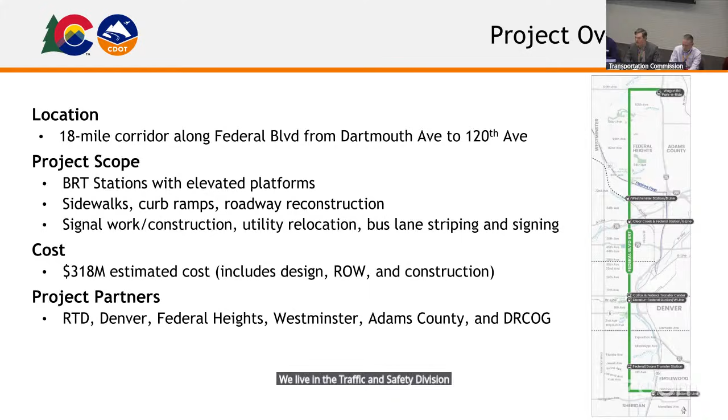Thank you, Jessica. So as Jessica mentioned, my name is Ryan Knowles. I'm the Bus Rapid Transit Program Manager for CDOT Region 1. We live in the Traffic and Safety Division and are led by Angie Drum, the Deputy Director of Traffic and Safety. We started the Federal Boulevard BRT project in late 2023 and have made really good progress over the past 2 years on this project.

As an overview, it is an 18-mile long bus rapid transit project from North Westminster at 120th Avenue to South Denver at Dartmouth Avenue. The project scope includes 74 individual BRT stations with elevated near-level boarding platforms, sidewalks, curb ramps, some roadway reconstruction in parts of the corridor, as well as signal work, utility relocation, and then bus lane striping and signing.

The overall cost for the 18 miles is roughly $318 million. This includes the design costs as well as right-of-way and construction. And we've been working very closely with our project partners, primarily the Regional Transportation District, also the City and County of Denver, cities of Federal Heights, Westminster, Adams County, and the Denver Regional Council of Governments.

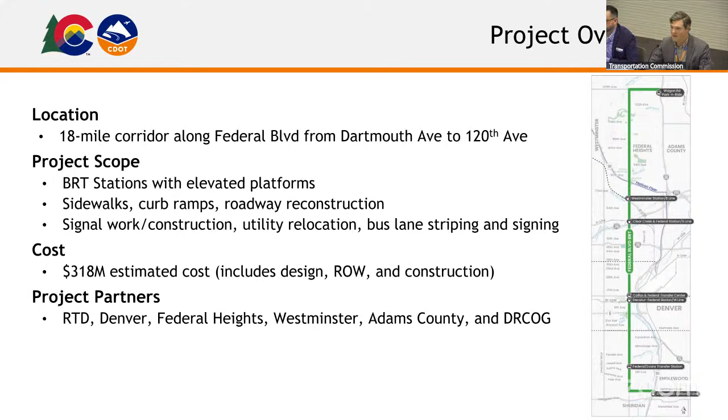Our goals for the project are to improve safety along that 18-mile corridor. Federal Boulevard is on the Vision Zero high injury network and has a disproportionate number of serious injury and fatal crashes. And so that's an important factor.

Also through our engagement, we've heard about the importance of safety and security at transit stops and on the buses. And so we're working that into the design of the project. The project intends to increase transit reliability and ridership with the intent to decrease transit travel times, making transit competitive with driving.

Along this corridor, we are promoting cultural vibrancy and quality of life issues. It's a very diverse corridor over that 18 miles. And so we're working very closely with the communities and neighborhoods along the corridor to improve those areas through this project. We're also focused on transit accessibility, primarily through the BRT components like the platforms that I mentioned, as well as improving connectivity and mobility.

So ensuring that transfers between transit routes are efficient and effective, and also connecting to bicycle and pedestrian networks throughout those 18 miles.

This previous summer, we completed our 30% design milestone, and we will be releasing an RFP for final design in the first quarter of this year. We're also close to completing our NEPA review and evaluation and expect our document to be signed spring of this year, and we're expecting it to be a categorical exclusion.

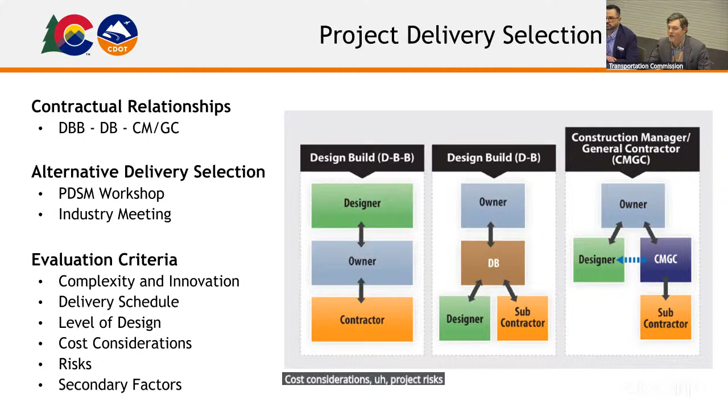So we evaluated design-bid-build, design-build, and CMGC for potential delivery vehicles. I won't spend a lot of time talking about the differences because we covered it last month, but we did evaluate the project in terms of complexity and innovation, delivery schedule, level of design, cost considerations, project risks. And then we included some secondary factors in our selection matrix as well.

We evaluated that criteria against our delivery goals, which are to achieve BRT revenue service by January 2030, in line with the greenhouse gas planning standard that we are mandated to meet. Prioritize safety and connectivity for all modes before, during, and after the construction phase.

Coordinate with local businesses to mitigate construction impacts. Maximize safety for workers and the public during construction, and also maximize the project scope and the improvements with the available budget we have when we start construction.

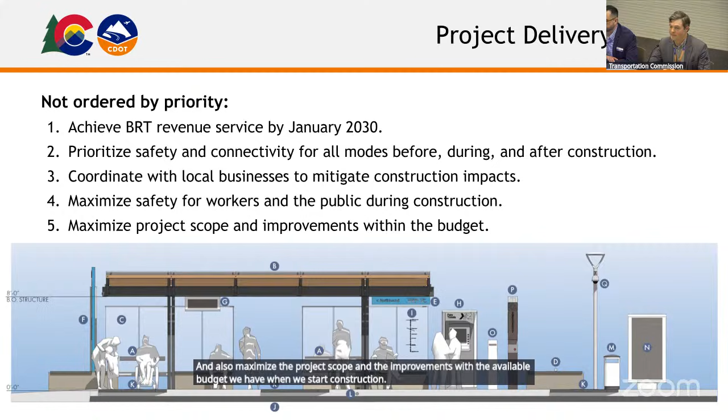Additionally, the CMGC method allows us to adjust packaging and construction phasing with the available budget that we have at the time of construction, which the other methods do not.

Finally, CMGC allows us collaborative risk allocation across the different packages that we may develop with the construction manager. That's important because it'll allow us to begin parts of the project that are ready for construction while other pieces that may be taking longer continue to be developed and worked out.

We held a public meeting for the industry on December 17th of last year, and we shared a lot of the information I just covered with the industry. We had over 30 participants at that meeting and recommended the CMGC delivery vehicle.

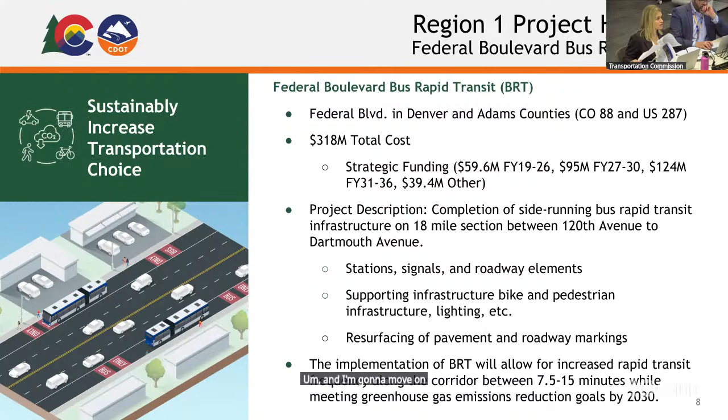Setting the stage here, because the I-25 corridor is so large and so complex, it spans several regions. I'm going to present the first couple of slides, then kick it over to Paul DeRocher with the Division of Transit and Rail to talk about the success of Bustang. But Heather and I both felt it would be helpful to give some background and context for the I-25 corridor, given its length, size, and complexity. You'll see the project spans both Region 1 and Region 4.

In 2001, an environmental impact statement was initiated, about two decades ago, with a record of decision in 2011. The limits of that environmental impact statement covered north of Union Station to Wellington and west to US 287 and US 85. Subsequent to the record of decision, many improvements have been made along the I-25 corridor, but several still remain. The corridor still remains a very high priority of all the stakeholders in the I-25 North corridor.

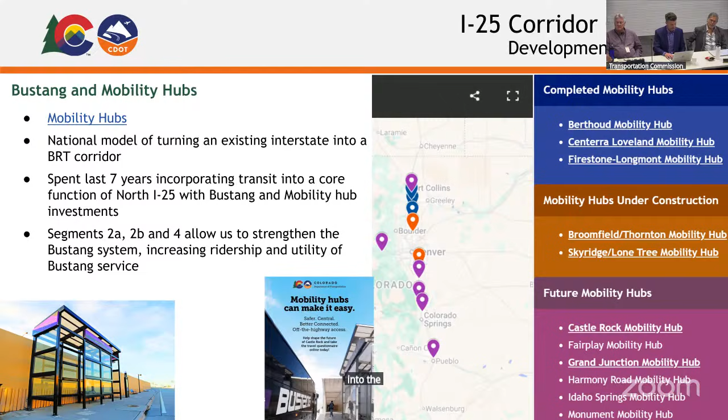Thanks so much. Okay, now that we've given you a little history and context of the I-25 corridor, we are going to deep dive into segment 2A, which is on the southern end of the corridor. Segment 2A on I-25 extends from US 36 to 104th Avenue.

We have about 270 million anticipated total cost. The project has been on the 10-year plan since 2020 and has been identified as a priority for stakeholders since the early 2000s. The project is currently undergoing an environmental assessment. As we discuss this project, we are looking at various alternatives, but we generally have an idea of what some proposed alternatives could look like.

Generally on this corridor, we have a major safety concern, both northbound and southbound. Crashes on the corridor occur almost daily, and the proposed alternative we've come forward with has a potential crash reduction of about 46% or more. On average, there are about 2.7 crashes per day on just this 5-mile segment.

For those of you watching the news or driving the corridor on December 28th, after Christmas, I-25 was closed twice for several hours—once northbound in the AM direction, and then again in the southbound direction for several hours. So it's really impactful when crashes occur in this part of I-25 and the corridor is closed.

As it stands, we're looking at alternatives to replace the fair-rated 88th Avenue bridges, which will include a new bikeway and expanded sidewalks on both sides, and the addition of a general purpose lane, both northbound and southbound.

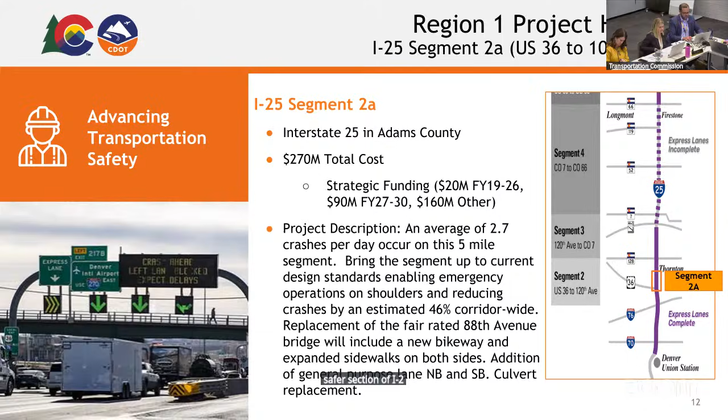Moving north, I-25 segment 2B from 104th Avenue to 120th Avenue. We're currently anticipating this would be about an $85 million improvement. Segment 2B is new to the 10-year plan, as Director Lew mentioned. We currently have this portion of I-25 in the out years of the plan, but this segment is not new to the local communities and stakeholders. They've been asking for improvements for over 2 decades.

Segment 2B currently has substandard shoulders that require improvements for safety and operational efficiency, as well as safe access for enforcement and first responders. Given that the project is in conceptual design, very early at about 15%, we've included a template in the 10-year plan with a conservative cost estimate that could cover improvements up to shoulders, potentially general purpose lanes, merge lanes, and a new pedestrian overpass at 104th by Cinzzetti's. The current one is starting to lose its useful life. As the project moves through design, the alternatives and solutions will be further defined.

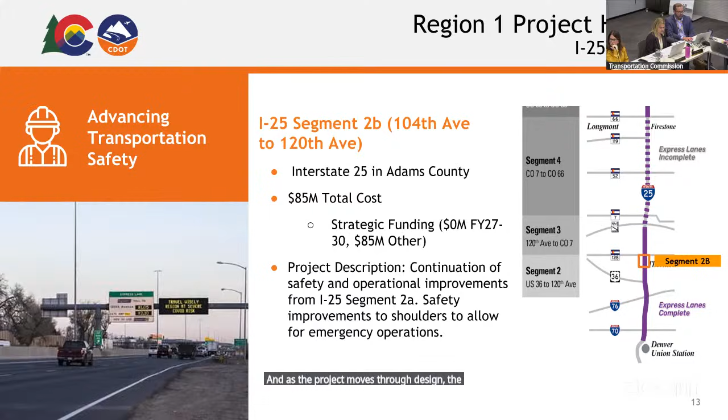Still traveling north on I-25 to segment 3B. This segment goes from E470 to CO7. We're anticipating a potential cost of about $315 million, based on FIR level design, which is about 30% design. So not crayon design anymore—we've got lines on paper and some levels of impacts.

I-25 segment 3B is new to the plan, and it is proposed in the out years. Again, it's not new to the local communities as a priority. Segment 3A is complete from 120th Avenue to E470, but 3B extends from E470 to CO7 and includes the full interchange build-out at CO7 and I-25. Once that interchange is constructed, it will provide regional and local transit connections from Boulder to Brighton and Fort Collins to Denver, as CO7 is seen as a major hub, with some proposed BRT corridors on Colorado 7 as well.

As I mentioned, this portion of I-25 is about 30% level design, so our cost estimate for the plan is based on that. The cost estimate also includes some cemetery right-of-way that's currently not being utilized—we're hopeful to potentially look at acquiring that before it's utilized—and a major utility transmission line relocation. If you've driven that portion of I-25, you've seen the large transmission line present.

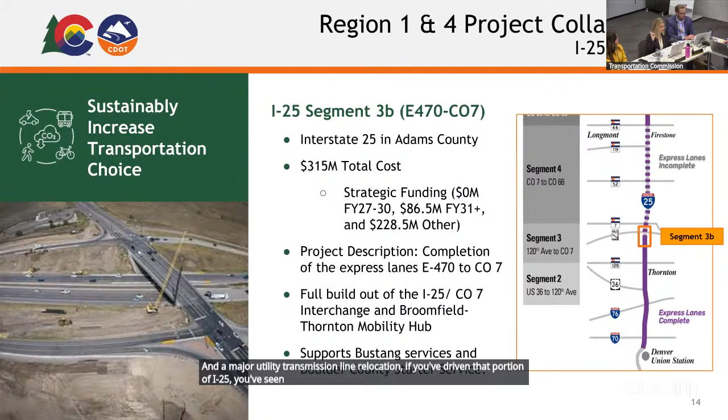All right, a project most of you have been hearing about for several months from the community, and mentioned several times today: the I-270 corridor. This project is currently listed in the plan for $900.8 million.

I-270 was in the original 2020 plan as one line item. The current proposal is to break out the project into various elements to show the project and have budget transparency. So if you're looking at the old purple colorful sheet and compare it to the new one, we've broken it out into several line items: critical bridges, Highway 224, Phase 1, Phase 2. What we really want to do is provide transparency to the public on where the bucket of the $900 million is being allocated, and hopefully provide all of you that transparency as well.

As I mentioned, you've heard a lot about this project. It's currently undergoing an environmental impact statement. Public hearings occurred last night, and we have our last virtual one. Thank you to those in the room who've been attending—those require a lot of effort, and we really appreciate your time if you've come to the meetings.

As proposed, the preferred alternative is the replacement of the corridor's most structurally and operationally deficient bridges, addressing key structural deficiencies and supporting future phases by advancing mainline segments to the selected preferred alternative footprint.

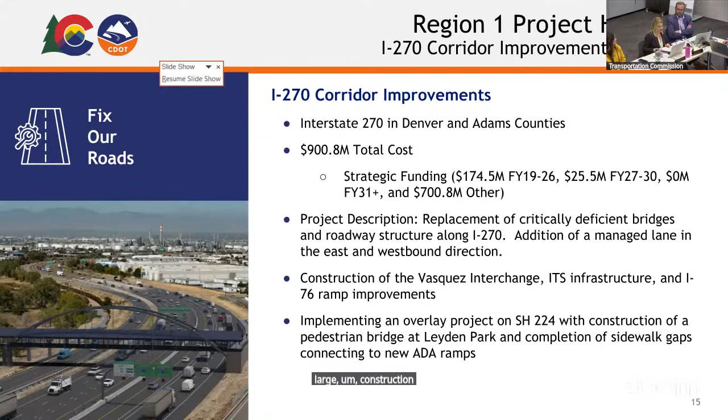All right, the North Stadium safety access improvements. This is a really fun project. As most of you are aware, the Broncos Stadium is moving to a new location, to a property at Burnham Yard. You can actually see it from our headquarter windows kind of down to the southeast.

So this is in the out-years of the plan. It is a new line item. It is an adjusted line item from our prior 10-year plan, where there was a $30 million line item sitting for I-25 safety and operational improvements. So it's not a new line, it's just kind of a renamed and redirected funding line for a very similar area.

As part of the infrastructure improvements for the stadium, the proposal for the 10-year plan is to keep that $30 million dedicated to improvements along the north side of the stadium, which you can kind of see on the map there. While other roadways will need to be upgraded and improved as part of construction of the stadium, many of those are under jurisdiction of the City and County of Denver, such as 6th Avenue and 8th Avenue. And several of those are also covered by the recently voter-approved bond that Denver just passed. CDOT has jurisdiction over Colfax, Highway 40, located on the northern side of the stadium site.

So while we don't know the exact improvements that we're looking to build or exactly what type of NEPA we'll be doing, we are working closely with the City and County of Denver and the Stadium District on a design and traffic and mobility study that will further define what we are going to construct. However, I do want to note that the $30 million is our max that the state is contributing to the stadium area. And I'd be remiss if I didn't say, go Broncos, beat the Bills.

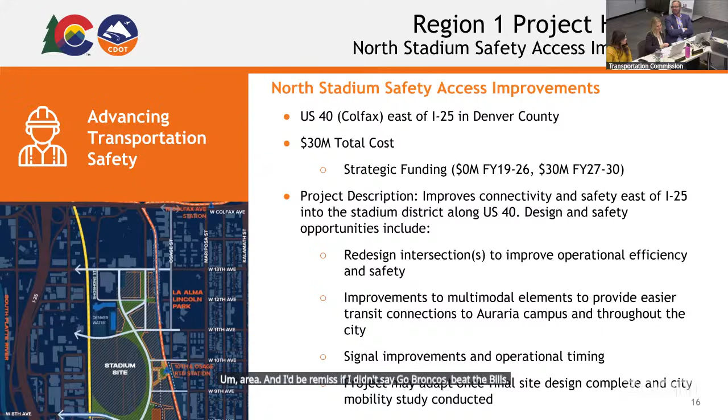All right, so a little bit smaller scale, but of real big importance. Some of these are our tiny but mighty things on our transportation system that you may or may not notice as you drive around. I'm hopeful that the next time you pull onto a ramp, you'll notice one of our ramp meters and you'll think, gosh, these are 1980s technology, very antiquated.

So this project aims to modernize our aging ramp meters. Those are the kind of lights you pull up to at a ramp and they sometimes are turned on and will signal red or green for you to move forward into the flow of traffic. We really need to modernize this system. As I mentioned, a lot of them are from 1980 and the computer technology behind them is just old and outdated. So we are looking at replacing the critical components of those, the detection equipment of the ramp meters.

So what do ramp meters do? They reduce congestion, they minimize delays, and they enhance overall safety of the corridor, and they contribute to more efficient traffic operations within the region. So this project is really critical for us to get out there and fix our roads.

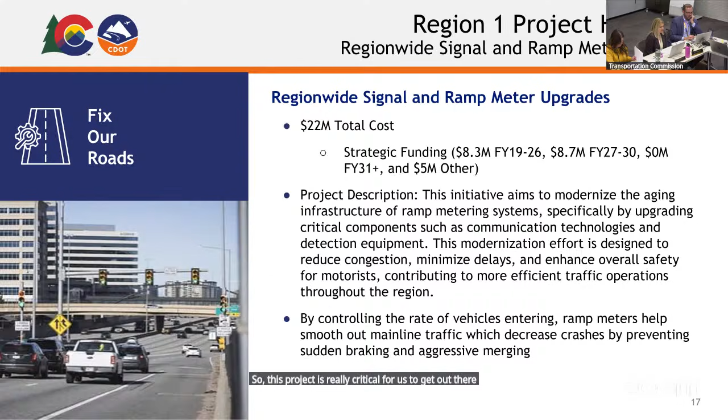And last slide, thank you. I mentioned earlier, Colorado Boulevard BRT. We did break that out, this is not a new line item in the 10-year plan. It is an item that is broken out from the region-wide BRT. Federal BRT is the other one we talked about earlier.

So BRT has been in the plan since 2022, and currently Colorado BRT is in the out years, so 31 plus for funding. It's currently undergoing Federal Transit Administration alternatives analysis, which we call AA.

We have yet to determine the alternative that we're moving ahead with. So the plan and the cost kind of assume what we think could happen, but we are still evaluating and getting input on these center or side running alternatives.

We do have public engagement underway. Currently, RTD serves Colorado Boulevard with Route 40. It operates 7 days a week, with frequency Monday through Friday every 15 minutes, and Saturdays and Sundays every 30 minutes. So what we'd be looking to do with the BRT project is improve the efficiency and regularity of that bus service along the corridor.

We have not applied for FTA funding as part of this corridor. That's something we'll evaluate once we understand the ridership and the alternatives that we propose.

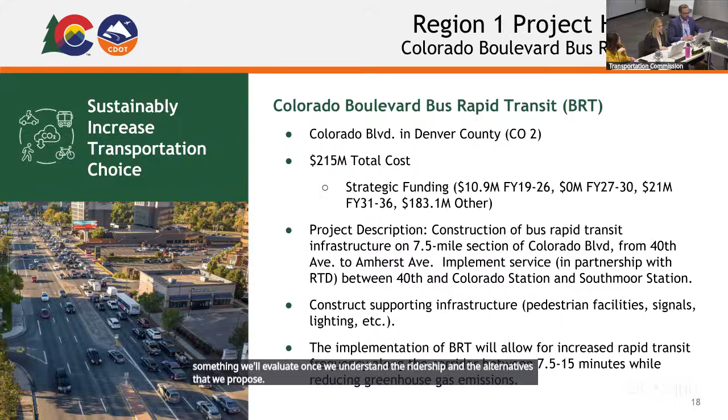And those are the ones that we highlighted for today. Realizing out of the 31, I only highlighted a handful. So if you have questions on any others in the plan, we're opening up the floor for questions. We had the whole project list within our packet.

Darius, did you have some? I think we wanted to give a pause before we move on to Region 4 for questions.

For Region 1 projects, before I do that, I wanted to say I had the chance to go to the 270 public hearing and hear the testimony on Saturday, and I saw on display the kind of work that you talked about, Director Lew. I'm really impressed with all that goes into these. It becomes more evident in those public hearings, but I know it's always happening behind the scenes. So thank you all for what you do.

Okay, any questions for Jessica? Yeah, Commissioner Ritter, go ahead.

Commissioner: Paul, you began by indicating that any improvements on I-25 were contingent upon funding of Bustang. That sort of puts a Damoclean sword over this commission, doesn't it? Because according to your chart, there was about 150,000 people that use Bustang, and there's probably, didn't put it up there, about 2 or 3 million that use I-25. I'm trying to get a sense of how that balances with the directive that unless we fund Bustang, there's nothing to improve I-25. What's the rationale on that?

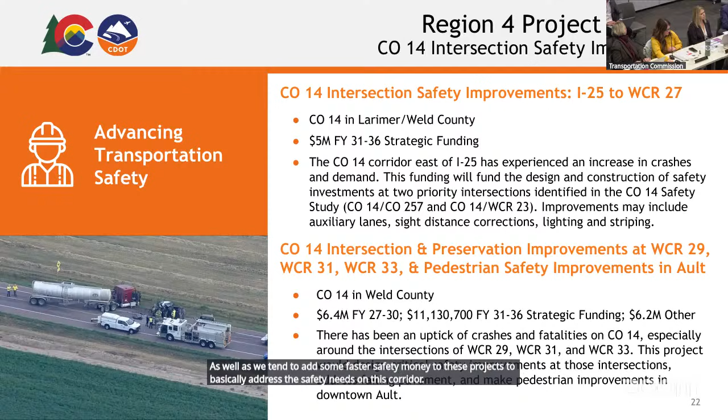Next slide. This is CO52, another safety project. This is a corridor where we did a PEL study pre-pandemic, and then had to update it during the pandemic to reflect those numbers and revalidate after the pandemic. 52 ties into 119 in Boulder County, and then stretches across the I-25 corridor into Weld County, crossing through many communities like Erie, Firestone, and Dacono.

This is another area where the triangles represent our level of safety service. If it's a red triangle, it's level of safety service 4, the worst level, identifying the highest need to address safety, and the orange circle is level of safety service 3. So this project is intended to take a look at those stretches where we are seeing high crash rates and see what we can do to improve those intersections.

One of the things heavily identified in the PEL is that this is really an old road that has no multimodal access, so no pedestrian walkways, and where they do exist, they're completely outdated as far as ADA ramps. So as we look at these intersections to improve operations and safety, we'll also be tying in those multimodal components to make it more of a multimodal corridor.

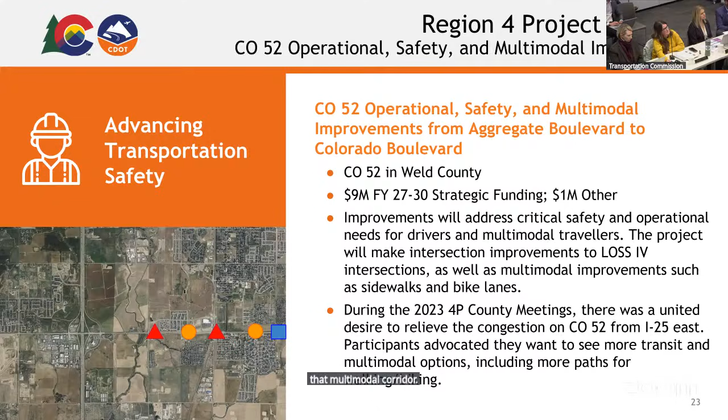Next slide. So this is I-76, between Keenesburg and Roggen, about a 10-mile stretch, also in Weld County. This is probably the interstate we hear the single most complaints on, probably second being I-70, which we are actively addressing as we speak today.

This is a section of road that ironically doesn't show up on the federal poor list, but is 100% low drivability. This is the one where everyone's dentures fall out as they're driving this corridor and everything falls off their trailer. So we're putting a lot of money into this interstate to do significant repairs, not a full depth reconstruction, but to preserve the life of this corridor. Our teams are out there consistently replacing potholes, and this is a high priority for this community to get this interstate back up to snuff.

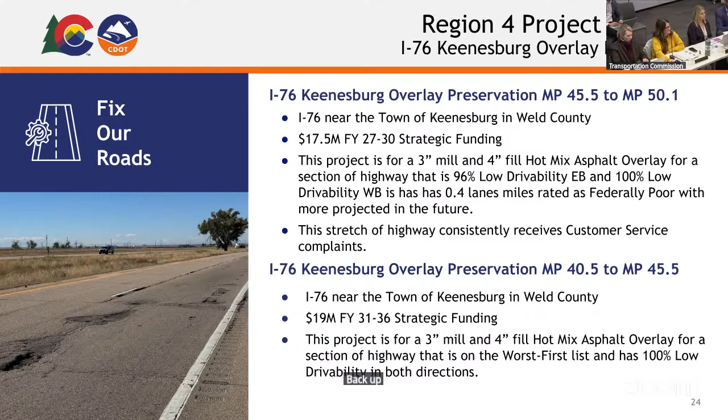This is a rural road, CO 59, not a county road, though it looks like one unfortunately. That picture is somewhat reflective of a lot of that stretch. We just recently did a project in the current 10-year plan, replacing about 10 miles of roadway, and we have 2 more projects identified, one in the next 4 years and another in the out 6 years of the plan. These roads historically never showed up in our surface treatment match because they're really old, haven't been replaced in a lot of years, and have really low volume, so they rarely rise to the top of the list.

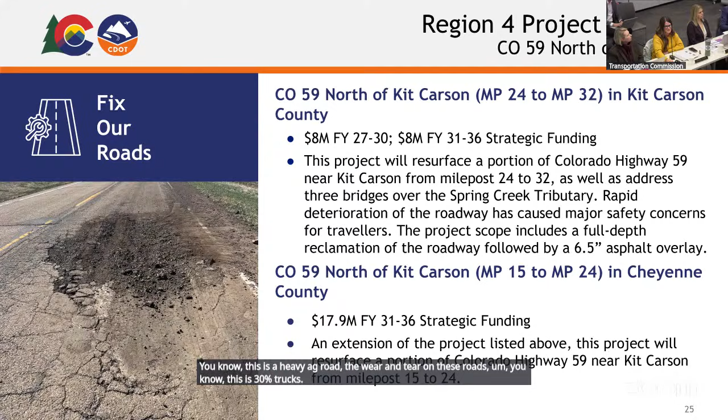Thankfully, through the rural resurfacing program in the 10-year plan, we can address some of these rural roads. This has made a big impact to the community out here, and they're very excited to see this. This is a heavy ag road, 30% trucks, and the wear and tear beats up the life of these roads pretty quickly. Next slide.

This is another wonderful picture. This is US 287, a concrete joint that is failing. We've got about $12 million in the next 4 years to evaluate why these joints are failing. We're doing a petrographic forensic analysis of the concrete because the rest of the concrete is in good shape, but the joints are not. The intent is to identify why these joints are failing and why the slabs are moving, which creates an unsafe condition. This roadway is 48 to 50% freight, and the jumping and trailers bumping up and down on these joints really creates a safety issue, which is why we're prioritizing this project.

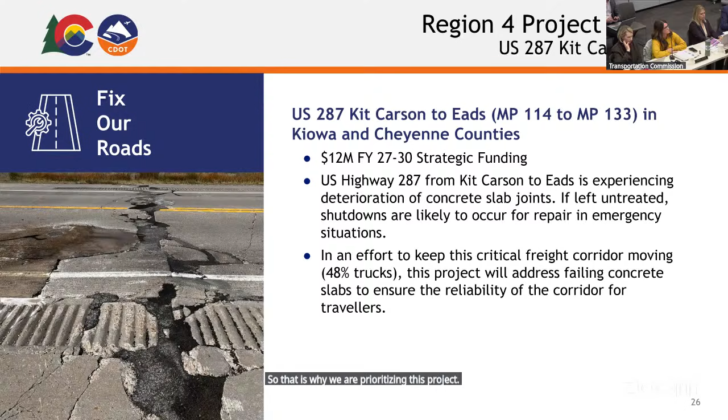Next slide. This is a project in the city of Loveland, on US 34 and US 287, right at the urban core of Loveland. US 287 actually splits here, as you can see. This project is modernizing the intersection. Today it doesn't safely address pedestrian safety or adequately handle the amount of freight coming through. So we're improving turning radiuses, providing pedestrian refuge through those intersections, and upgrading ADA ramps.

Loveland was one of the cities that rebounded really quickly after the pandemic as far as their transit goes—they have a very successful transit program. This project is going to incorporate some of those transit stop elements at this intersection. So this is actually a pass-through project, but we're partnering with the city of Loveland to help close the funding gap they need to get this project delivered.

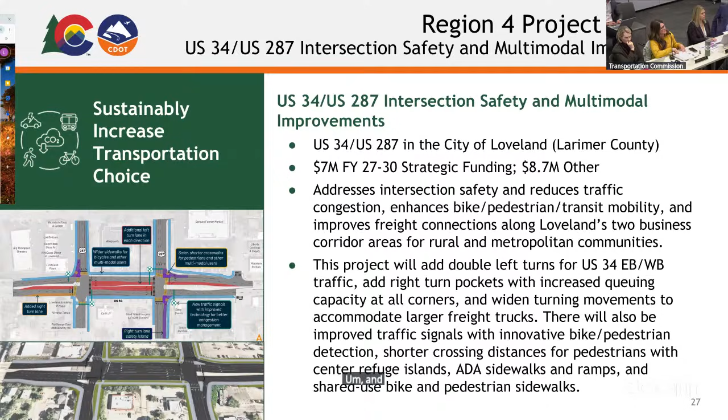Okay, next slide. So I know we've talked a lot about I-25. This is the segment in Region 4, ironically called segment 4. As Jessica mentioned, the EIS started in 2001—this corridor's been studied for a really long time. I'm sure many of you know this, but 90% of Colorado's population lives in the Front Range, and I-25 is the vital backbone to the Front Range.

I always called it the spine or the bloodline to northern Colorado, but honestly, from New Mexico to Wyoming, it is a national defense route, it is a national freight corridor. It is what really connects all of the Front Range from one community to the next. So this project specifically, segment 4, adds an express lane.

This is an identified form of traffic demand management with very high performance. It guarantees trip reliability and is very attractive to transit, as we demonstrated through Bustang. Our express lanes encourage carpooling, and through CTIO's effort in segment 2, they've measured greenhouse gas reductions.

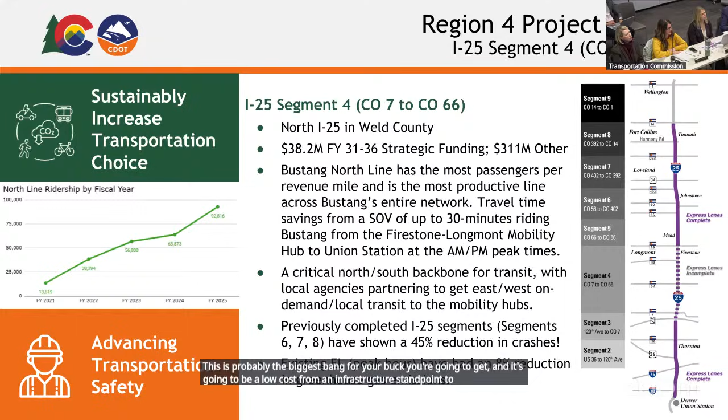So some of those modelings—I'm with Shoshana, all models have error—but some have proven accurate based on my own user experience. Segment 4 is pretty much built out; Weld County, during the EIS, built the interstate wide enough for the express lane to be added into the middle. So as far as cost-benefit goes, this is probably the biggest bang for your buck, and it'll be low cost from an infrastructure standpoint to add an express lane to the I-25 corridor. That's all I have.

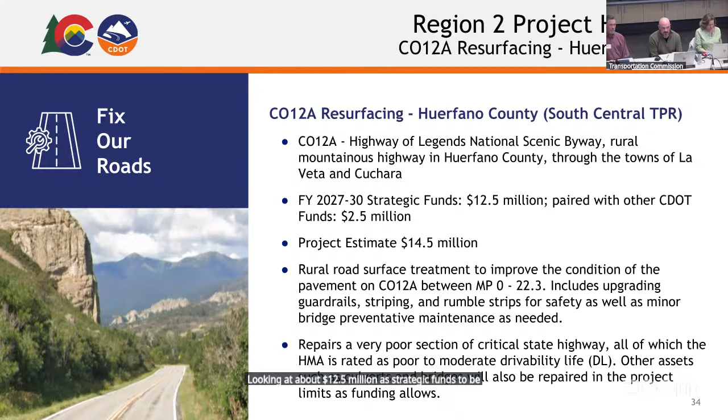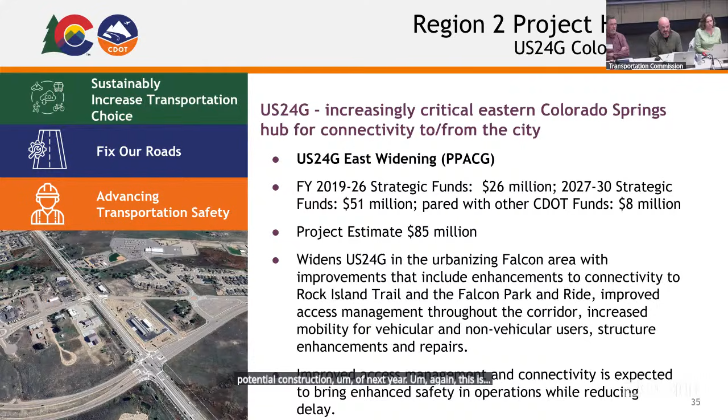Next project is in the Pikes Peak Area Council of Governments area in Colorado Springs. This is their #1 project for the past couple of cycles - an $85 million project east of Colorado Springs on US 24, where for about a 2-mile stretch we're going from a 2-lane to a 4-lane section, doing a significant amount of access control to include a new frontage road, drainage improvements, safety improvements, and new access points to Rock Island Trail as well as the Falcon Park and Ride. We're looking at trying to go to advertisement with this project probably in the fall of this year, with potential construction next year. Again, this is Pikes Peak's #1 project in the area for the strategic plan.

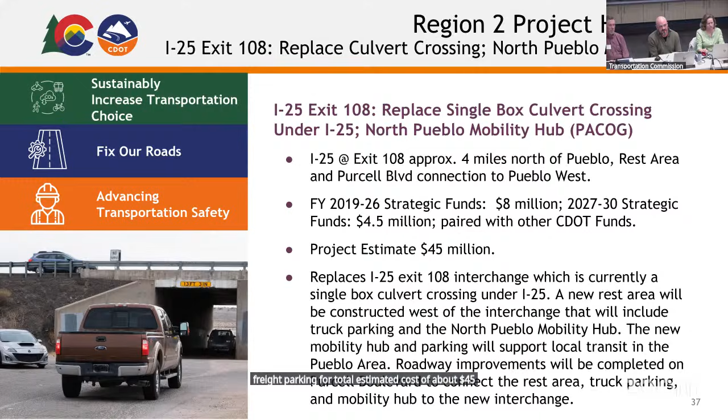Quite a bit of connectivity from Pueblo West to the 108 area. That's Purcell, essentially a corridor heavily utilized by commuters from Fort Carson to Pueblo West. A significant portion of soldiers live in Pueblo West and take I-25 down to Purcell to get to Pueblo West.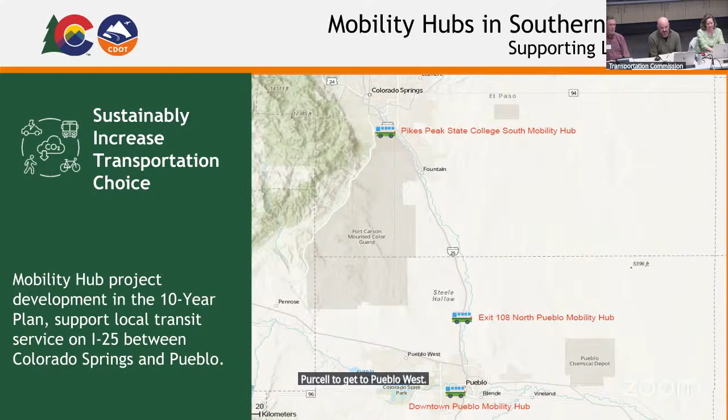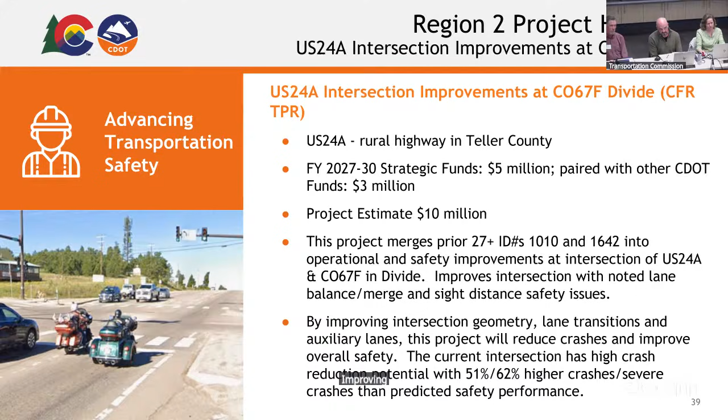Next project is a safety improvement project in Teller County, part of Pikes Peak Area Council of Governments as well as Central Front Range. We're looking at an estimated cost of $10 million for an intersection improvement project at US 24 and Colorado 67 up in Divide, which addresses a significant crash reduction by adding acceleration and deceleration lanes at the intersection. We're estimating a crash reduction potential of 51 to 62%. Currently, the intersection does not have accel/decel lanes, so we expect a significant improvement in crash reductions in that area, as well as improving sight distance conditions along that corridor in both directions.

Last project to discuss is Colorado 9 up Hoosier Pass in Fairplay. We're looking at about $16 million for the project, asking for about $8 million of strategic funds to be paired with about $8.5 million within the region. It really is reconstructing Colorado 9 up to the top of the pass. We'll be partnering with Region 3, which has a number of projects identified north of the pass toward Breckenridge, to address their side of Colorado 9 and knock out issues on either side of the pass. Good partnership there, and we're looking forward to getting that one knocked out.

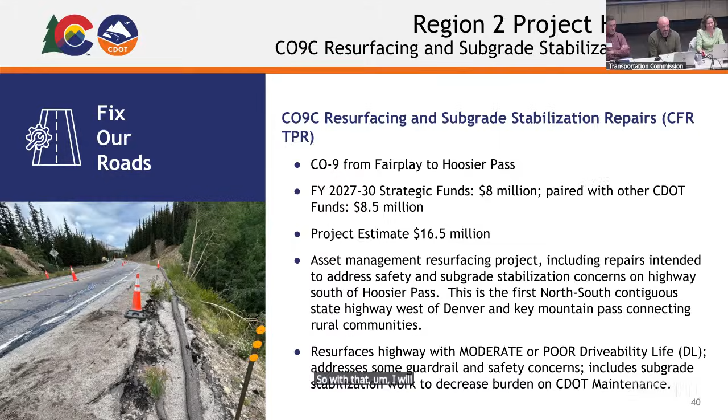We do know there's quite a bit of sliding of the roadway base, as well as needs for reconstruction and investigation for some of the geotech issues we see along that corridor. So with that, I believe that was my last slide for Region 2. I'll open it up to questions.

Questions for Shane? Go ahead, Commissioner Hart. Thank you, Madam Chair. Just a couple of comments. First of all, Shane, thank you for your presentation. I've had the pleasure of working with Shane and his crew for the last 4+ years, a great group of dedicated professionals really tackling a lot of difficult challenges throughout Region 2 with limited funds. My hat's off to them every time we sit down and talk about a project. But a couple of things I wanted to point out that are alluded to in these presentations.

Southern Colorado, I don't know if folks in the Denver metro area where I grew up are always aware of the possibilities there. Southern Colorado has the ability, and we'd really like, to help relieve some of the traffic concerns in the northern part of the state. One way to do that is to improve the efficiencies of the systems we have in Southern Colorado. First, Highway 50 - every time I get a chance to talk about it, whether in my previous life as an elected official or here, I want everyone to know a lot of us feel Highway 50 needs to be 4-laned all the way from Kansas to Utah. That would greatly increase the amount of traffic shifted from northern to Southern Colorado, with the added benefit of improving the economy of Southern Colorado, which generates the revenue we need for our transportation needs.

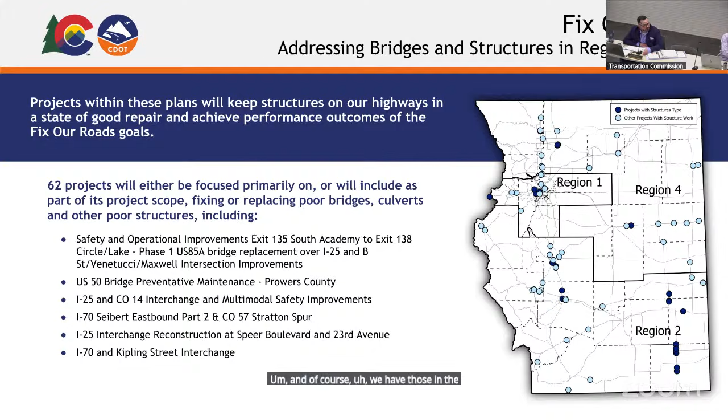As we go into safety, I wanted to mention some of the projects that are going to help with improving safety throughout the three regions.

37 of the projects being proposed in these three regions are going to improve safety through wider shoulders and added passing lanes throughout highways in the state, including examples such as the US 34 passing lanes and safety improvement projects, and the US 85 corridor improvements from Brighton to Upton, among others.

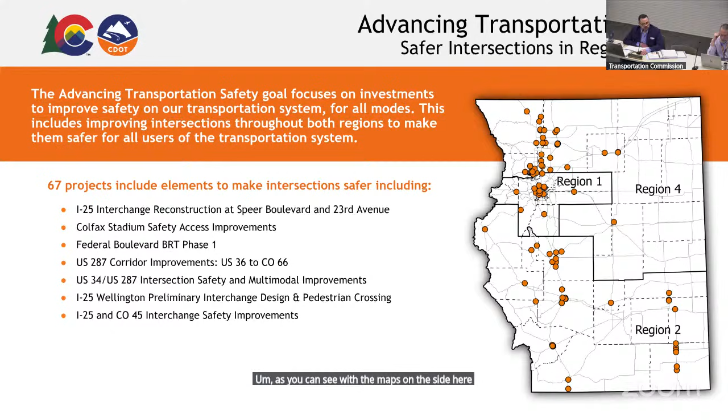67 of the projects are going to be focused on making intersections safer. We have projects such as some mentioned previously in the region presentations, but also others like the I-25 Wellington Preliminary Interchange Design and Pedestrian Crossing Project, the I-25 and Colorado 45 Interchange Safety Improvements, and many more, as you can see with the maps here and what's available in your packet.

Finally, we want to point out there are projects with wildlife components helping to reduce wildlife crashes. While we don't have as much as in regions 3 and 5, we do have some in regions 1, 2, and 4. One of those projects was mentioned earlier by Shane, but there are others throughout these three regions as well.

Next, looking into sustainably increasing transportation choice.

As mentioned in the November presentation and seen in the packet, $6 million a year has been set aside for fleet, supporting the Bustang fleet in the 10-year plan. That will be for maintaining and purchasing the Bustang fleet, which supports lines such as the North Line, the South Line, and Outrider routes throughout the Front Range.

There are also 14 projects that will support Bustang through investments in outrider stops, transit centers, and mobility hubs, with examples such as the Idaho Springs Mobility Hub, Woodmen Road Mobility Hub, the Fairplay Mobility Hub, and others throughout the packet.

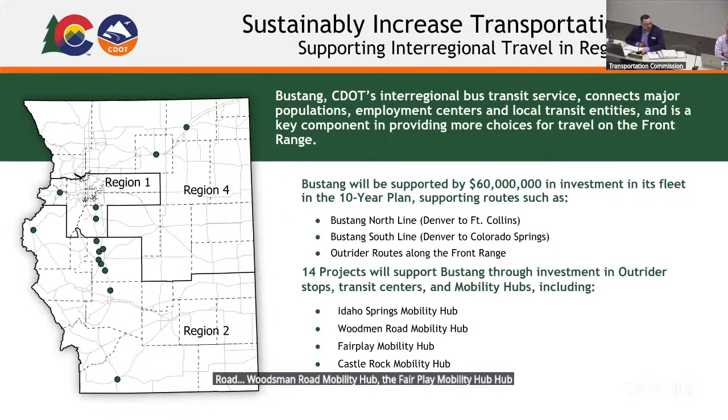There are 30 projects listed that help support local transit service with local partners. There were many good examples in the presentations given, such as the Federal Boulevard and Colorado Boulevard BRT, the Pikes Peak State College North and South Mobility Hubs, and many other examples. Another great example is the Colorado 119 Bus Rapid Transit Safety Mobility Improvements, a carryover project that is continuing to be constructed as we speak in Region 4.

And finally, when we take a look at active transportation, 54 projects have active transportation elements throughout the plan, with many examples listed here.

Far too many to mention in the limited time we have in the presentation, but those are all listed in the packet, and thank you, Chair Cook, for mentioning that. We do want to mention the project types and project elements so you can see at a high level what is being proposed on the many different aspects of those projects. It's not just focusing on one aspect, trying to improve pavement, but also active transportation elements, improving safety, improving structures, and everything else when we're able to go out and do the work with these projects throughout the state.

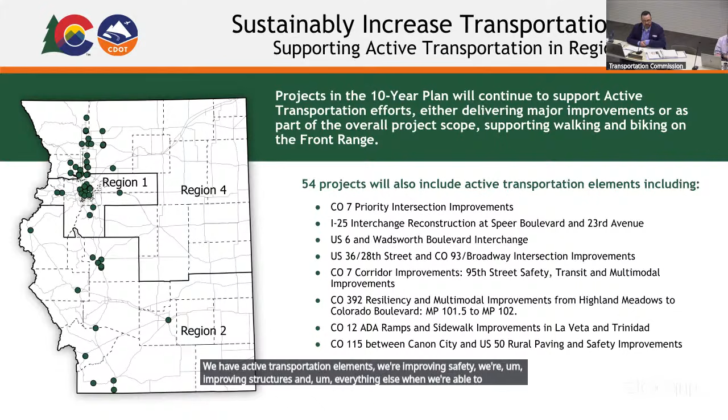Next slide, please. Finally, there's the Joint Service and Front Range Passenger Rail. These projects don't receive strategic funds, but they are important projects as part of the transportation solution over the next 10 to 20 years. I believe there was a presentation to the commission in August on these projects, but at a high level, the Joint Service Passenger Rail between Union Station and Fort Collins, and the interagency agreement signed between the partners on that, and of course Front Range Passenger Rail along the Front Range corridor.

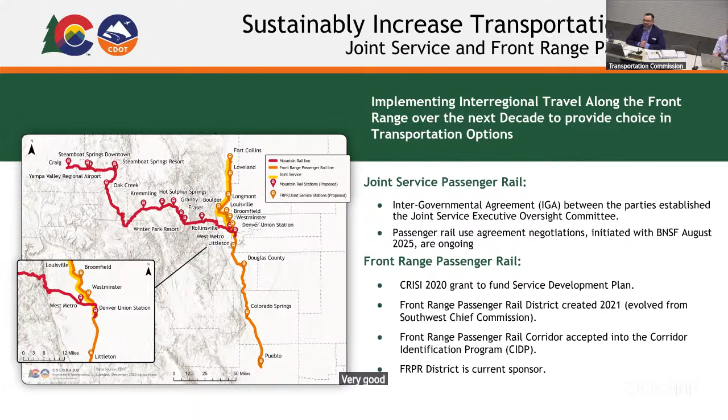Next slide, please. So to wrap up, I wanted to take a look at the plan as a whole now that we've introduced all of those projects to you as part of the November and this month's presentation. If we want to go to the next slide.

I do want to emphasize that we had an outreach and process working with our local partners over the past year and a half, which started back in May of 2024. While CDOT primarily works with our rural partners, which includes numerous meetings and the telephone town halls the commissioners held, our MPO partners have done that as well, in order to help get to the point that we're at today and get the priority projects brought forward.

My staff, and primarily the DTD staff, has been working hard to develop not only the statewide plan, but this plan, in order to put together the investments that we believe, from what we heard from our local planning partners, are the most important items to fund over the next 10 years and identify in the 20 years, as part of not only the 10-year plan but also the regional transportation plans that our MPO partners and the rural TPRs put together.

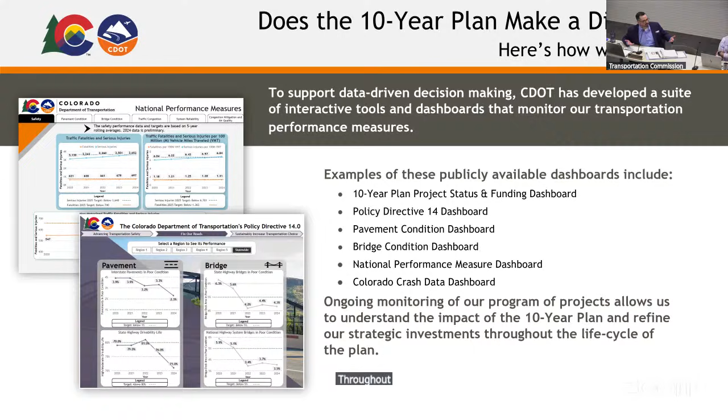So we have information that we're able to see to make decisions, because as we go through this, we have opportunity to make updates to the plan throughout different stages as situations change. Let's go to the next slide, please.

All right, finalization of the next steps. And I think this is the one I wanted to get to. Next slide, please.

As we look through maintaining the plan, if there's any projects that come in and off, that's a commission decision that will be brought forth to the commission. Same thing with moving around funds - occasionally the chief financial officer brings forward a resolution to move project savings or funding around for 10-year plan funds. That decision will come forward. And for management of those projects, there's a robust project management process for managing these as well.

Plus, the commission approves the STIP that allocates the funding decisions for the next 4 years as required under federal statute, and approves the annual budget in November, and I think in March as well, that truly allocates the funds.

And then we will update the plan again, at minimum, in about the spring of 2029. Those out years, the 31 plus, become a little bit more real in terms of dollars. We have a little bit more certainty in what those dollars look like. So we will reevaluate and put those dollars in and have those conversations again.

A quick clarification question. Have all the comments we've been getting, do those get automatically fed into our consideration, or do they have to resubmit? Well, it's an interesting question, and I think we can work with our Office of Public and Government Relations staff to see if for a 10-year plan project we can show that on there. We haven't really published all of these projects yet on the 10-year plan, even though some are carryover, but we can consider that piece going forward, knowing some comments have come in before. So instead of opening it for 2 weeks and closing it at the end of 2 weeks, allow the comments that have been coming in to be included, I guess.

Okay, any questions? Go ahead, Commissioner Jones. Thanks, Darius, thanks for that really comprehensive presentation, and to the region directors for their very detailed talk as well. Really appreciated it. I had a question.

Before I came on the TC, I understand we adopted PD14 performance measures, including specific things around 1% annual reduction in VMT per capita, and increase in statewide revenue service miles for transit, that kind of thing. Do you take the draft 10-year plan and analyze how and whether it is on track for helping us meet the goals that we set for it? At some point in this process, do we get to see how the plan is doing with regards to VMT reduction and whether or not it's meeting the goals that we set?

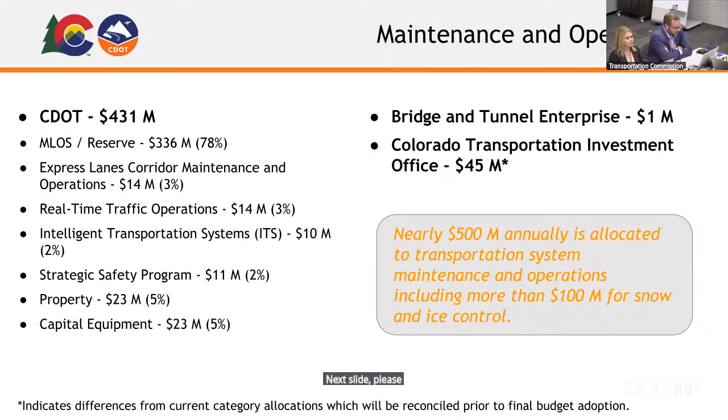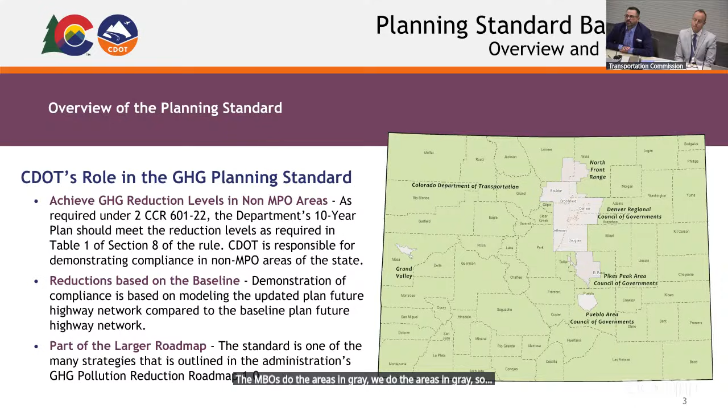Compliance can be achieved through the project mix and what is called greenhouse gas mitigation measures, as guided by Policy Directive 1610, adopted by the Transportation Commission shortly afterwards, later in 2022, and I believe amended briefly in 2024.

Looking at past results, CDOT previously demonstrated compliance in the non-MPO areas through the GHG planning standard through an initial update to the original 10-year plan, with a report accepted by the Transportation Commission in September 2022 with mitigation measures.

As I noted in the previous presentation, all of the MPOs have submitted a revised plan through the planning cycle with a report accepted by the commission, except for Pueblo. Their cycle hasn't come up yet since the rule was adopted, but that should be coming up shortly in the next couple of months.

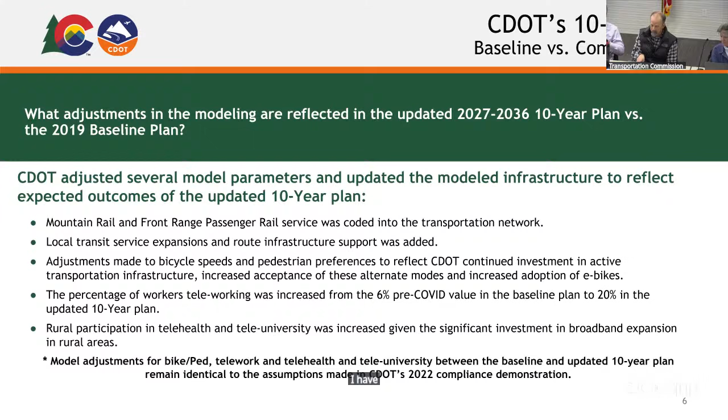Again, just emphasizing that we are using the standard tools in doing this modeling work. For the non-MPO area, the green area that Darius mentioned earlier, we use the state's model. Each of the MPOs does this exercise for themselves using their own model in their areas. We also use the latest available MOVES model, the EPA's GHG and other pollutants emissions model, when doing this work. So we're just keeping up with the standard tools.

It's important to note that things do change through time—there are always changes going on. We did some work, for example, with the APCD to update estimates of fleet mix out there on the road: how many trucks, how many passenger cars. So we're always examining our latest data and making sure we're up to date.

We did go through a modest adjustment with the IAC, the Interagency Consultation Team, to slightly reduce the EV penetration rates we'd been assuming—slightly lower than when we did this exercise in 2022, but not a big difference. The main target was to make it match up with what our finance folks had been assuming in their revenue forecasts. I'll go into details on that if you'd like.

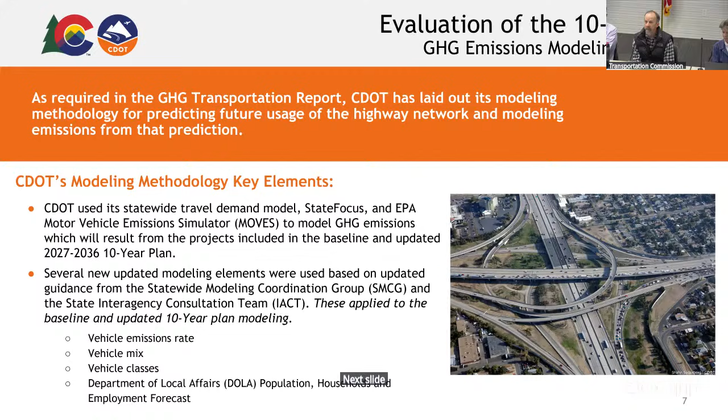So all of that—the combined effects of a number of things we changed in parameters, like fleet mix and others—ended up making it slightly easier to hit the GHG target than when we did this in 2022. Particularly DOLA's smaller expectations for the state, we'll just go with 2050: they're making smaller forecasts of growth into 2050 than they did back in 2022, which means the overall total of emissions is somewhat smaller.

Nevertheless, we're still hitting 1.5 million metric tons—that's a 2030 number. The fleet mix numbers also changed; there are some counterintuitive things I'd be happy to detail, but basically the changes meant the VMT was a little dirtier, so each mile driven by cars and trucks is emitting somewhat more. When we have dirtier VMT to work with, all of our measures that reduce VMT are a little more effective, because every mile reduced cuts more emissions than it did back in 2022. So combining these two major effects, the overall result is slightly easier to hit the target than before. And I think that's my last slide.

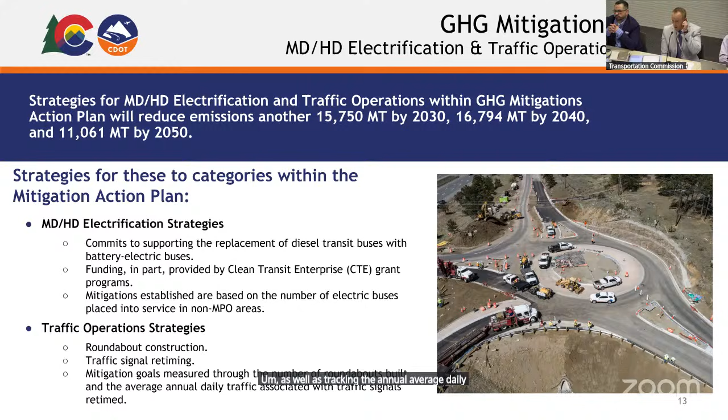And with that, I think I'll turn it over to Darius for next steps.

As required under the rule, we do have to provide this to the Transportation Commission for review and acceptance prior to any type of adoption. We're having this workshop now that we have workshopped all of the 10-year plan projects and have those available for your review. We'll provide the potential adoption through resolution and acceptance of this report at a future commission meeting. This will be adopted through resolution. As mentioned at the very beginning, per the rule, this has been verified - all the technical data - by the Air Pollution Control Division. The letter's on page 300 in your packet. And as always, we will provide annual reports on our mitigation action plan on April 1st, as required under the rule.